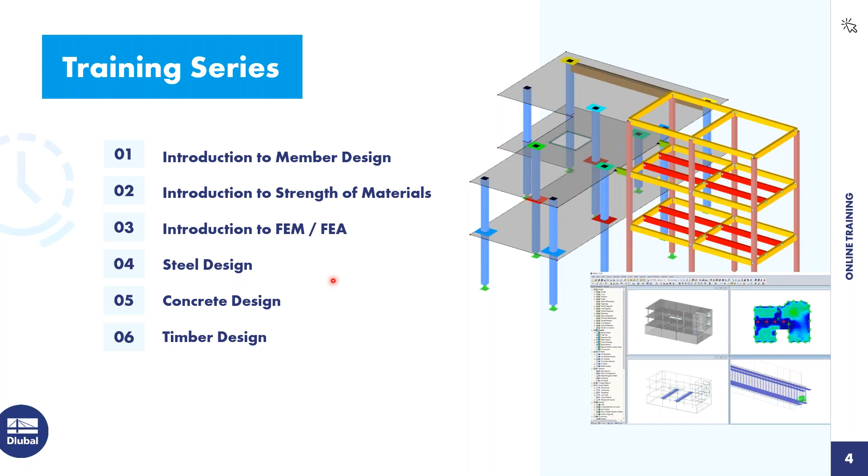Good, so our training series has 6 parts. Today is the 5th part, the concrete design. What can you expect from today? First of all, we start with an introductory example. We will model together a concrete beam with a cantilever. Then I will hand over to Juliane and she will show you how to design a concrete slab. So let's jump right into it.

No theory, only modeling in RFEM 6. So I will open this example and create a new model. For this case, I think it's familiar for you. I'll go here to File or click here on New Model. And now I create in this dialog a new model with the name concrete beam. I will leave it here as a 3D type of model and everything else is set.

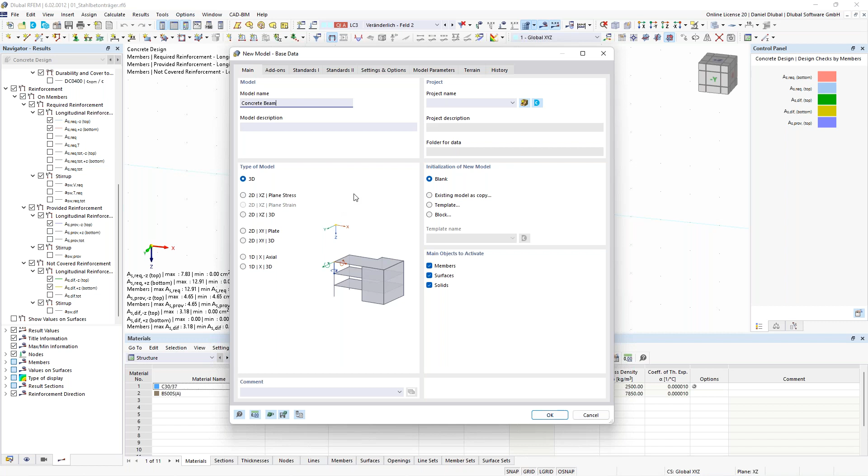Now for me it's important to activate the add-on concrete design. So here we go to the design add-ons, activate concrete design, because then we get additional design properties for our concrete beams or concrete slabs. So I have to activate this. When I have activated this, I go here to the 3rd tab, Standards.

Here in the Standards I see different chapters like for the design, standard group, load results, and also load case classification. And here I want to design it according to the European Eurocode, with this national annex of Europe. Okay, I will leave it like that and just click on OK.

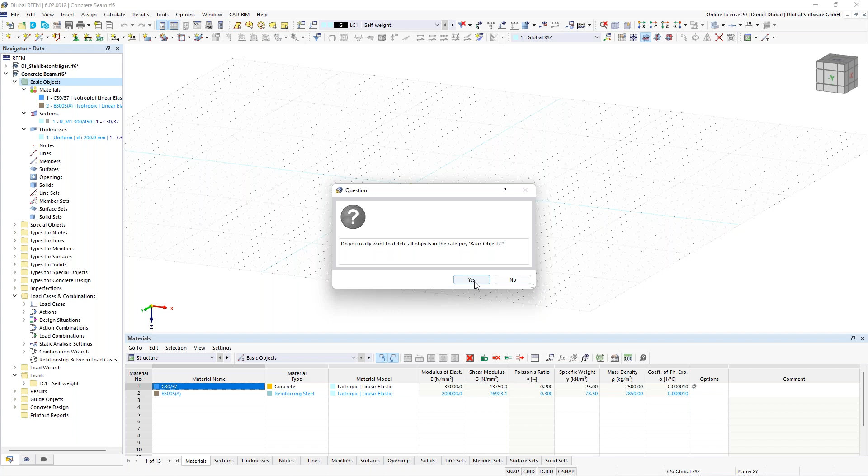And a new window opens. As you can see here on the left side, I have already some materials, sections, and thicknesses, and they are remembered from the last project I did. So I will delete them in order to create all these 3 things from new, just to show you how to do it. You can click here on basic objects with the right click and say okay, delete all basic objects. Now we can create it from scratch.

Okay, so before we do this, I would like to know from you if you already have some skills in concrete design with structural analysis programs, just to give me a kind of status about your knowledge regarding your concrete design skills. So I have prepared a poll, which I will start right now. Please answer these questions to give me feedback about your knowledge.

Okay, now most of you have voted. I close this, share the results, and yeah, so most of you have already designed concrete structures in a structural analysis program, I hope it was RFEM 6 or RFEM 5. For those who don't have this experience, that doesn't matter, you'll learn it today.

Okay, so again, back to RFEM. Here on the left side in the data navigator, I will create 2 materials, because for concrete structures we need 2 materials: one for concrete and one for the reinforcing steel. So I go here to new material. Now one of the biggest advantages here in RFEM 6 is that I can search for a material via this text box here, and I just enter here.

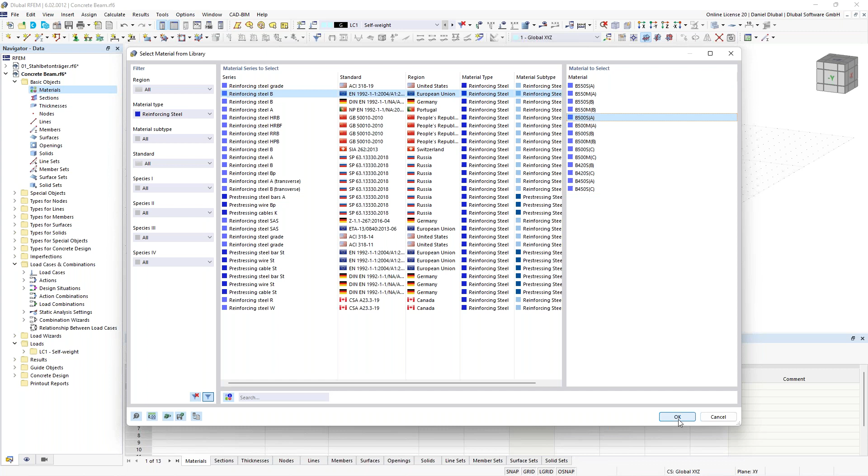So in this case, I choose here this B500S(A). I click OK. And yeah, this was it. I click OK again.

And the next one is to create a new section. So because we will model and design a concrete beam, I click here on section, click here on new section. And therefore I have to choose here this rectangle massive cross section, or when you don't have this, just go to the cross section library and choose this massive rectangle.

Then I can give here the geometry: I have a width of 300 millimeters and a height of 450 millimeters. Then I can see also the section values according to this geometry and also the stress points. And if I want, I can also show me the unit stresses. In concrete design, not so important, but yeah, we have implemented also this here. Okay, that's everything, I click on OK.

Thicknesses, I don't do right now. This will be more the part of Juliane, because she will show you what thicknesses are. Thicknesses are similar to the cross-section things for members. Yeah, this is the similar thing: thicknesses you need for surfaces, and sections for members.

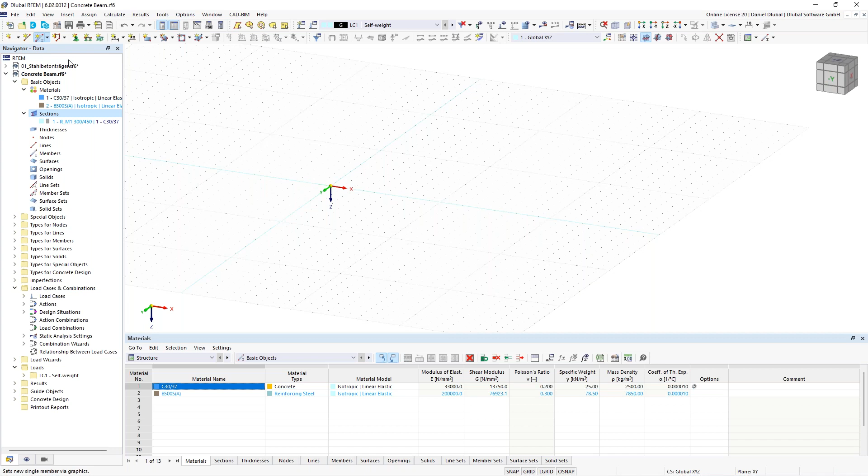Okay, so now we will model it together. We will model the beam. I go here to the symbol bar, click on new single member, and now I choose here the right section because I have only one section. This is everything, so I click OK and draw this member 8 meters long. I can do this via the grid points or also by inserting here the member length like 8 meters.

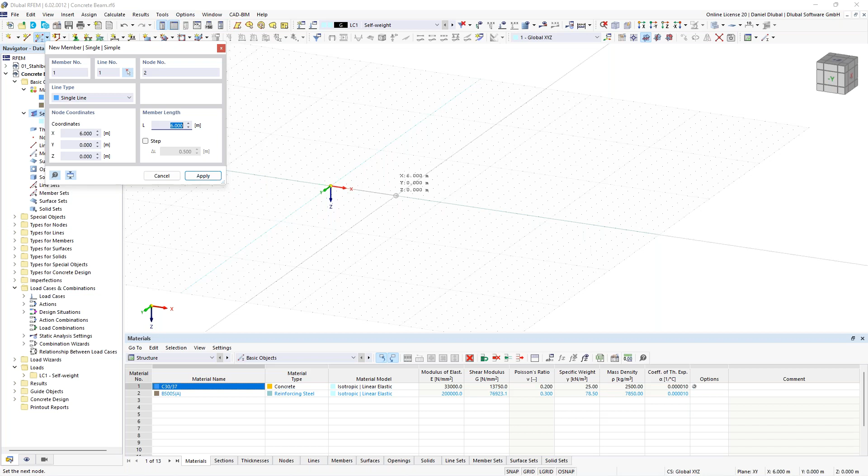And as you can already see, we have here already the provided reinforcement based on some general information about this concrete beam. We can modify it afterwards, of course.

What I want to do right now is that we divide this member internally. So the member remains as one member, but we will add an internal node. Double click on the member, activate the option nodes on member. And there I want to switch between an absolute distance. I say here, okay, from start please 6 meters away. And here you should create a new node.

I click on OK, and you see here this blue node. Double click on this node, he has the node type 'on member'. So this is a really nice opportunity, giving this node the option to be part of this member and not to divide it. Okay, so the next thing, supports, node support.

So I create here a new nodal support. Also, I want to activate the rotational around the global X axis in order to prevent torsion, and then a roller support along the X axis. This is this one. I click on OK. Perfect. Okay, yeah, so much to the modeling.

Now let's go to the load cases. I go here to the symbol bar, edit active load case. And here I have the self-weight. This is okay for me.

Now I want also to consider an imposed load case. In this case, we have two fields, one field and the second field. So I create the first one, this is imposed load field 1. Now I copy it and click here field 2. Now I choose here load case 1, because then I jump to load case 1 where I set some loadings.

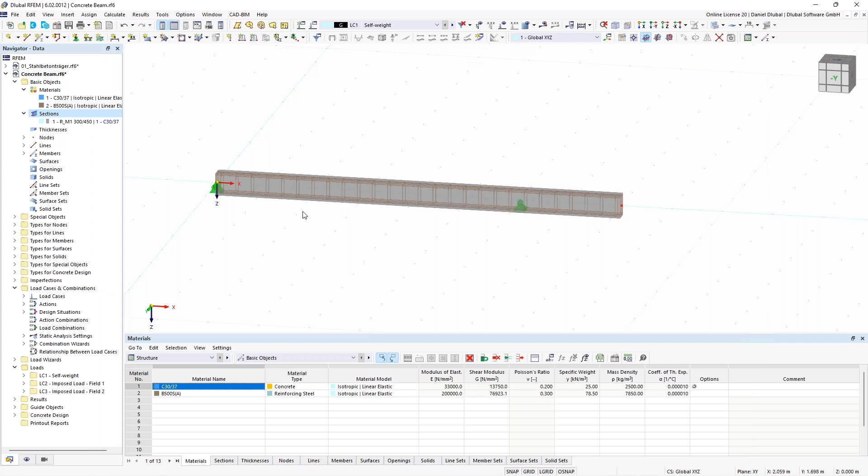Okay, so the whole concrete beam has a member load of 10 kilonewton per meter. So I click here on this member load, insert here a value of 10 kilonewton per meter.

And now the biggest advantage here in RFEM 6 is that I can stay in this dialog, just select the same member, and then afterwards just change the load case and add the parameters like the load magnitude again to the members. I don't have to leave this window. This is a real good advantage.

So I click this member, say apply and next. Now I change the load case, and now I have to change the load distribution because we only want to apply the load on the left field. So I say trapezoidal. Here in this case, I have 20 kilonewton per meter, 20 kilonewton per meter on the right side, and the load distance goes from 0 to 6 meters. I say in this member, please apply and next. Now I change the field and say from 6 to 8. I can insert here 1, say okay.

Now let's do a check. Okay, seems good. So back to the load cases, maybe a few words to that.

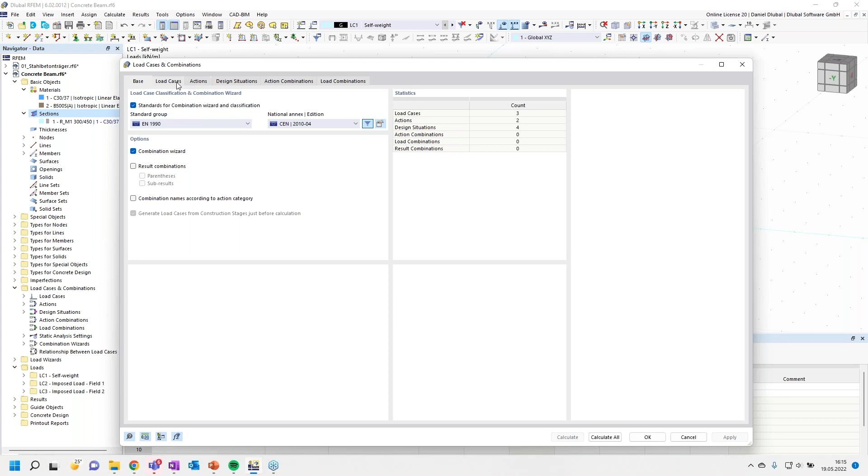So we have here this load case classification according to this European standard, so according to the Eurocode, and we also have this combination wizard. This combination wizard helps me combine different load cases with each other, considering the partial factors. Now we see here also these different actions, and depending on these actions, it will get me the right factors for combining it, and according to the design situations, it will combine it. So you can also take a closer look at the combination rules, like here.

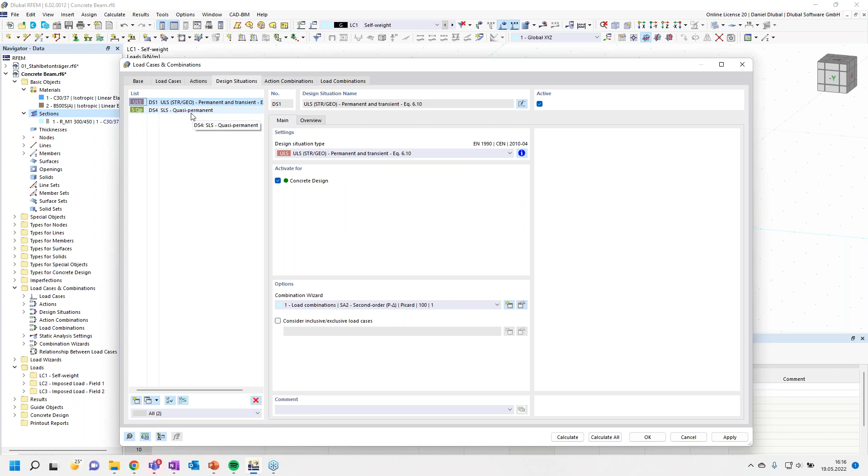Yeah, and for our simple example, we don't need so much design situations. So these two serviceability design situations, like characteristic and frequent, I will delete. I only need this ultimate limit state and this serviceability design situation, quasi-permanent. And let's go to the action combinations. And here, these are the factors I need for my load combination. Okay, good, this is everything.

Now click on OK. And now I need to define my design properties for my concrete design. So where can I do this? Double click on the member of this concrete member. And now you see here the design properties.

And when I have activated the add-on in the base data concrete design, then this option will be activated automatically. I can also deactivate this, and now you see, okay, all these registers here and the upper menu will disappear when I deactivate it. The other tabs are there. So...

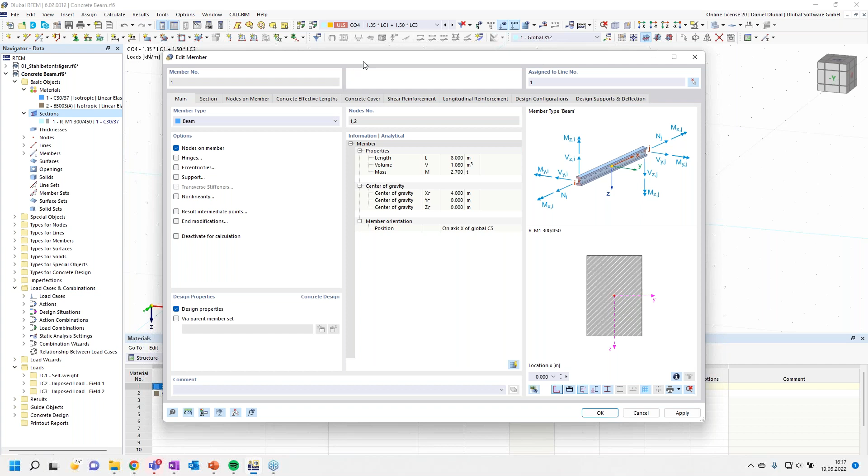What we do now is go through these tabs. What we don't need is the concrete effective length for any stability proofs, but this is a classical bending member, so I can neglect this.

So I go here to the concrete cover. Yeah, the concrete cover is pretty clear. So you have different exposure classes in order to determine the concrete durability. So you can open this. Now it's for all section sides. You can modify it. You see here this different exposure classes. Sorry, exposition classes was the wrong word.

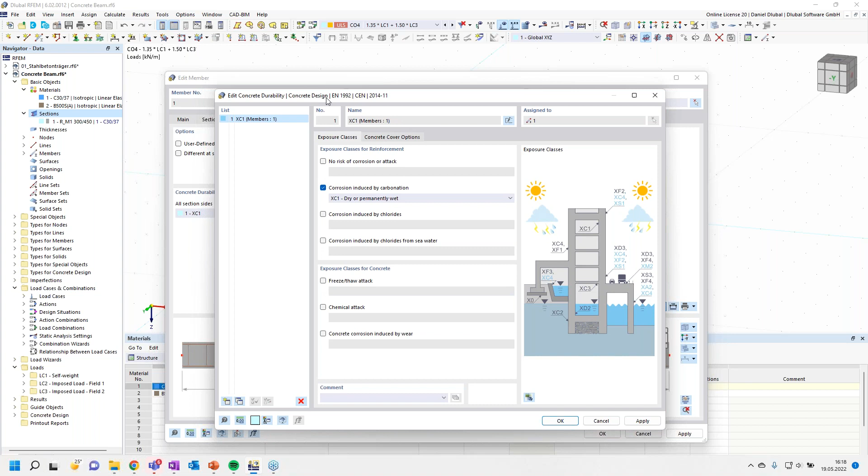Exposure classes. Here you have XC1 up to XC4 due to corrosion induced by carbonation, or also here when I want to consider exposure classes for concrete freeze-thaw attack, and so on. And through these exposure classes, the minimum concrete cover is determined.

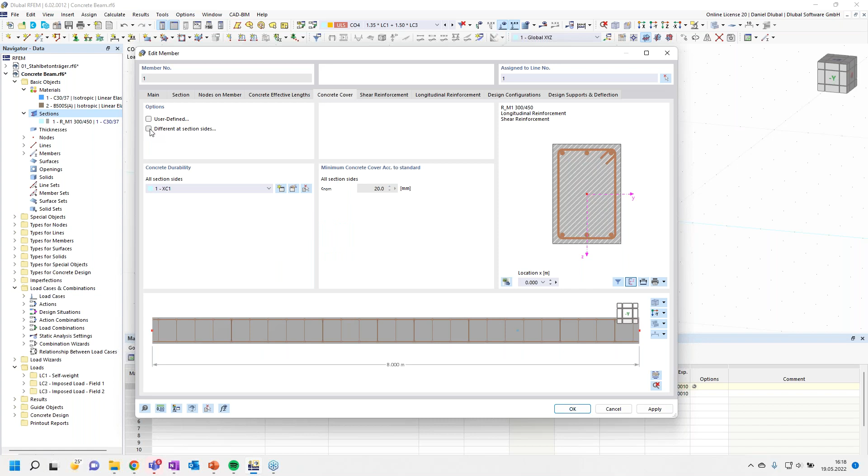So for our simple example, this simple XC1 is okay. I say okay again, and this minimum concrete cover is determined from the outer edge of the concrete rectangle to the outer edge of my stirrup reinforcement. And these are 20 millimeters, determined by the exposure classes. I can also say a user-defined concrete cover, or when I want to consider it for each side differently, I can activate this different at section sides option. Okay, so much to the concrete cover.

You see also here on the left side, you can add more shear reinforcement spans, then you can separate the distances into several fields within this member.

Okay, now let's go to longitudinal reinforcement. Here I have also some possibilities regarding the reinforcement type, symmetrical, unsymmetrical, and in this case I choose unsymmetrical. Okay, unsymmetrical means that the top side and the bottom side are different. So for the top side I choose here 2 and change the diameter from 20 to 12. And also I want to activate a lateral sidebar with 10 millimeters. And for my bottom side, I choose here 16 millimeters. Okay, so much to that.

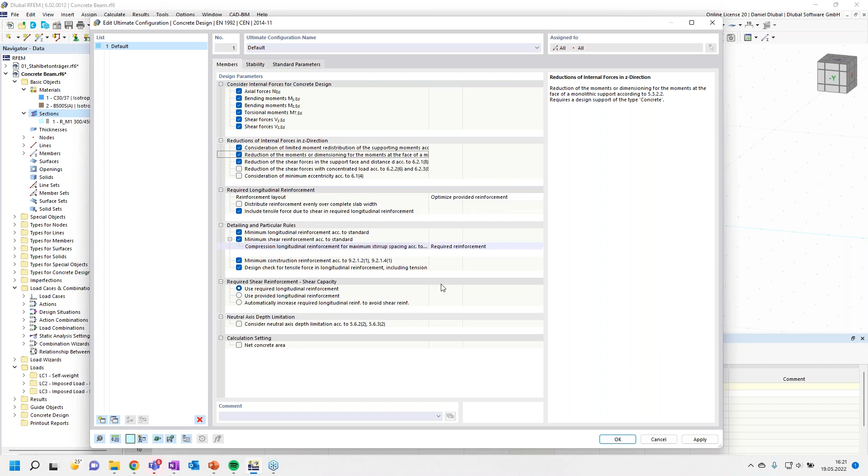So yeah, here you can define also several other options for the design of concrete. These are the information given by the standards. Okay, and the same also for the serviceability, but yeah, this is some more information.

So now the last tab is the design supports and deflection. When you want to design the deflections, so really the deformation proof, then you have to define here different design supports. We do this here for this simple beam. So in this case, I create a new one with a support width of 360 millimeters, and it's no inner support, only support in Z-axis.

And yeah, that's everything. Now I create a new one also with 360 millimeters. It has a monolithic connection, and the ratio of moment is in this case 0.9, and I don't need to consider any y-axis. I click on OK.

Now I have to assign it to the right nodes. So that is on member start, this is correct. And now here to the middle, the second one. Oh, sorry. No, this is not correct. Now this is correct. I say OK.

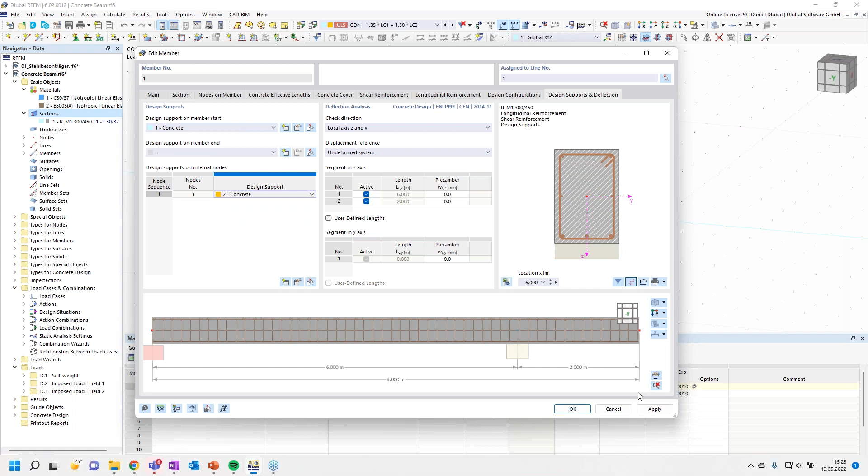And now I can calculate it. Let's say concrete design. And now you see, okay, how the whole situations are calculated, also for the serviceability.

And what I don't need is to design for the serviceability limit state. I only am interested in the results of my ultimate limit state. So I calculate the concrete design again. And now I see here the different design ratios for members, and I see, okay, here detailing of members, and also the ultimate limit state section resistance is not fulfilled.

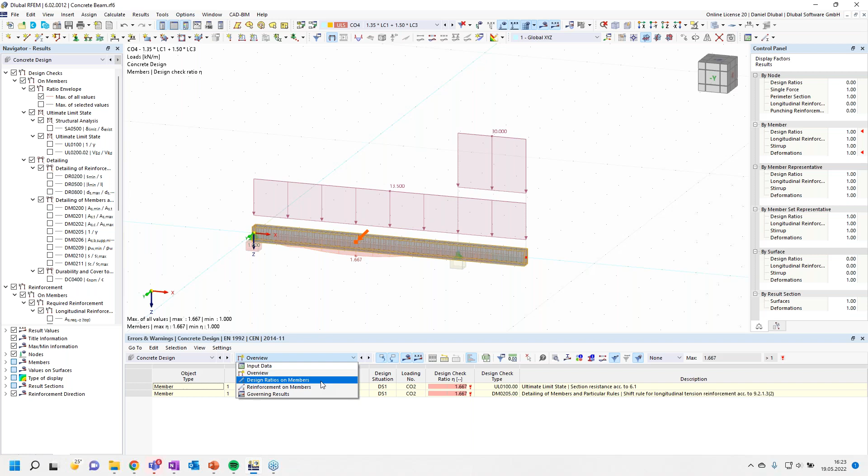So what can I do? I need to strengthen my reinforcement. Maybe here some words on this reinforcement. Here on the left side, I see the results navigator, and here I have the possibility to show me different results, like the reinforcement.

So I see here the required reinforcement for the, maybe I deactivate the design check. I can show me the required reinforcement for the top and the bottom. For the top and the bottom reinforcement, I can also show me the stirrups and also the provided reinforcement for the bottom side.

And I can deactivate here the rendering of the reinforcement by going here to the display navigator, go here to types of concrete design and deactivate it. And now I can see here the result a little bit better. So I see, okay, my provided reinforcement is lower than the required reinforcement.

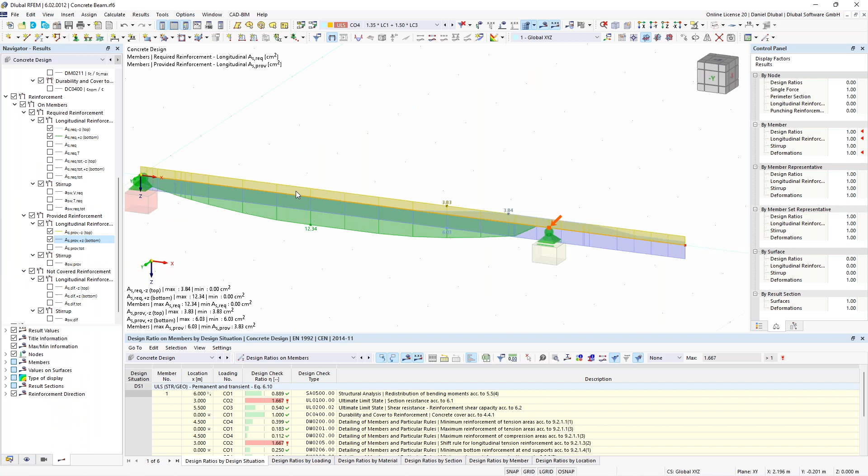So I need to add some more rebars. And also, in order to calculate the difference, what I need, so the not covered reinforcement, I can also show it. Okay, so what can I do?

Go back to the concrete beam, go here to the shear reinforcement. Now we want to add more rebars for some places. So I go here and copy it. And now I want to cover it for different fields. So you see, okay, the start and end goes from 0 to 4. I say, okay, this should go to 6.

And this one should go from, oh sorry, this should go from 5 to 7 with a distance of 0.1 meter. And the other one should go from 7 to 8 meters.

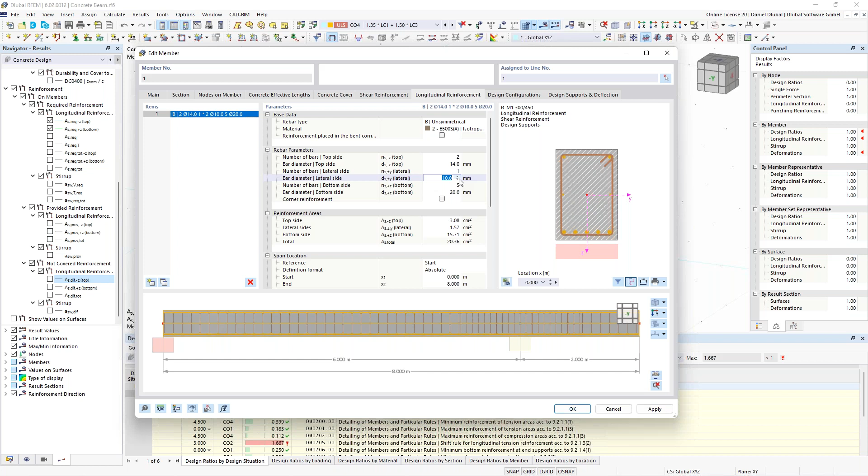And the longitudinal reinforcement, let's make it quite easy. So what can I do here is just increase the diameter here for my top side and add here a diameter for the bottom side to 20 with 2 bars more. And it looks like that. I can show me also this reinforcement plan by clicking at this icon, and I see it here like that.

Then I click OK. I design it again. And now I see here my fulfilled example, my fulfilled design check ratios. And by clicking on one of this, like this one, you see also here this design check.

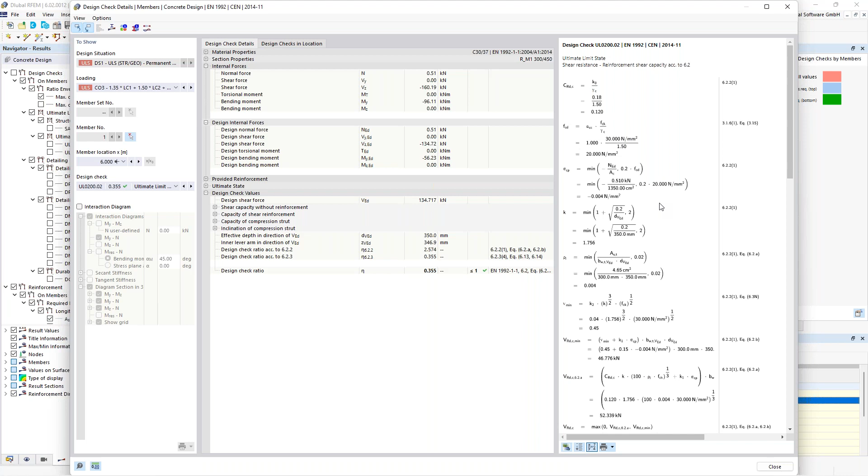Also, you can switch here to different design checks. So in this case, we have here the design check according to this standard: shear resistance, reinforcement shear capacity. And when you are studying and you want to compare your results with the results of our program, then you have here an overview of how the program did this. Okay, so much to the beam design.

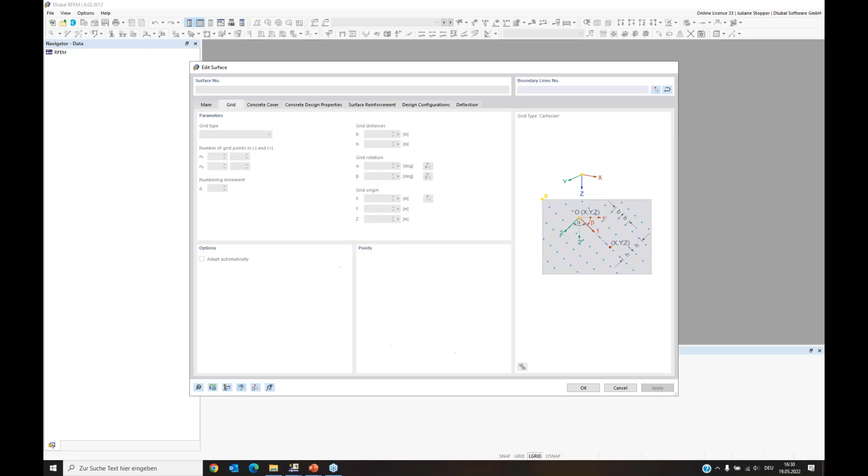After that, we will do the analysis and use the results for the concrete design. So this is it so far as a preparation. Now we can go into the program and start modeling.

I will again open a new model with this icon here, and we get into the base data dialog. I enter the name, it will be a slab, and it's made of reinforced concrete. So as additional information, I give it here.

And yeah, the other settings we don't need to change. Again, we have to activate our design add-on, the concrete design, and in the standards I also want to keep the National Annex CEN as Daniel did. Okay, so we can agree and say okay, this is okay.

So now an empty model is prepared for us and we can start modeling. And I would like to use a guide object with you. I would like to use a background layer.

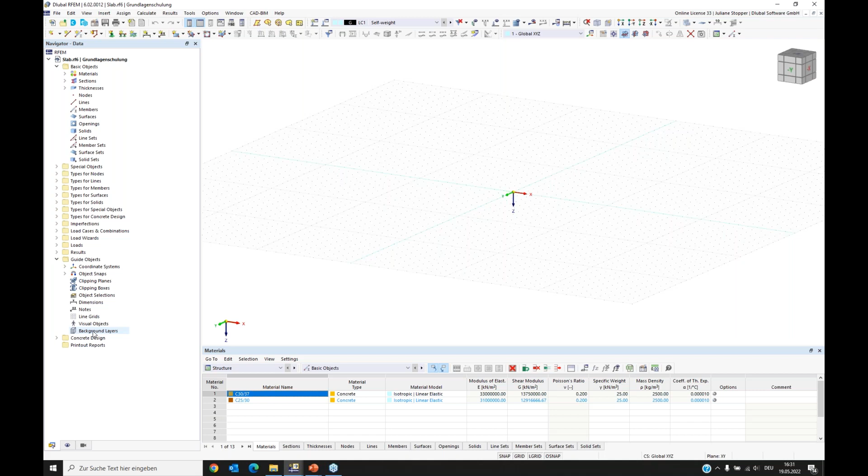We have a drawing from the architect in DXF format, and we can use it as an orientation to create our RFEM6 model. Therefore, I have to get the file from my folder where I put it, and I have here the ground plan for our slab. And we have here the preview.

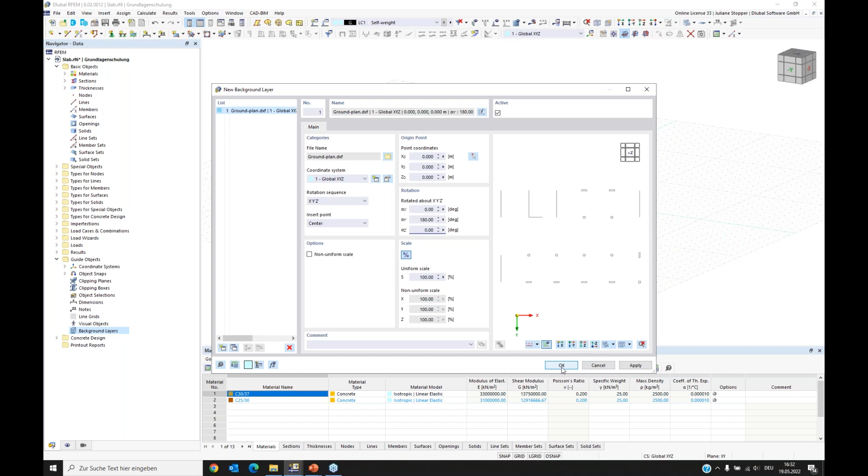We can check it, and looking at this, I can see that I need to rotate it with an angle of 180 degrees around the y-axis. Now in my preview I see this is what I wanted—I want the ground plan to be positioned like this as a background layer. So I can say okay, and I have it in my model now.

So all these lines are DXF objects. Now I need to create my objects that I can use for the RFEM6 model and the analysis. Therefore, at first I want to start with the lines.

I will create the boundary lines for the slab. We have one here and we have one here. If you want to end any process you are in, you can do it with right click, and you can leave the thing you are doing currently.

So now I want to copy this line. I select it, therefore, and I press Control, and I can click on the line and then draw it to here. Okay, and I will do the same with this line. I press Control and I can put it here, and I finished my boundary lines.

Then also I want to have lines here, because the lines we see are DXF objects, and I need to have parts of the structure modeled with RFEM6 objects.

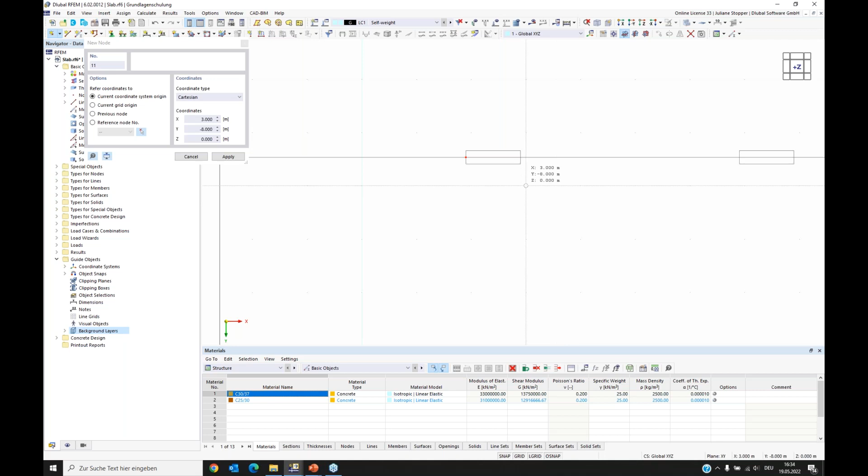Okay, so what I also need is nodes. I need nodes for these places where the supports or the columns are placed. So I put some nodes—I will do it here. I can see that I need an X value of 2.40, but I cannot reach here correctly. So I put this node here and I put another one here.

Now I can edit this node. I double clicked on it and I can see the coordinates here. As we saw, I need 2.40. I can say okay, and it goes there. And here I checked it, I need 7.40, and then it will be at the right place.

Now I prepared the nodes on that line, and I need them actually in this line, and this axis as well. So I have to select them. I want to copy them. With pressing Control, I can again and again add to the selection. Now I want to use drag and drop.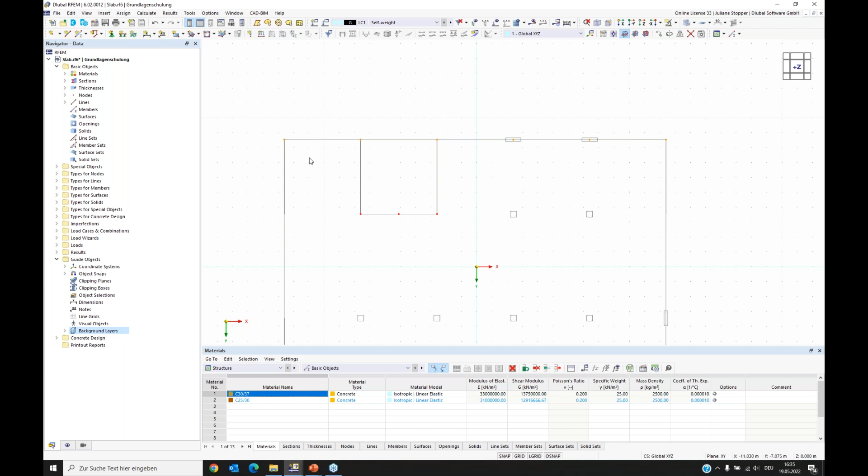I again press Control and I can take the node, copies are created, and I can put them at the place where I want them. Here's the end of the wall and it fits. Now I can see the newly created nodes are selected again, so I can go on with them.

Now I want to show you this menu. I did a right click on the node. I also can use this move and copy option. I say I want to create a copy and I have to give the displacement vector here. Now I want a vector like this. I can say apply and I can see the program copied it, and I can repeat this and do another copy into this row and say OK. Now I have all the nodes that I need for modeling.

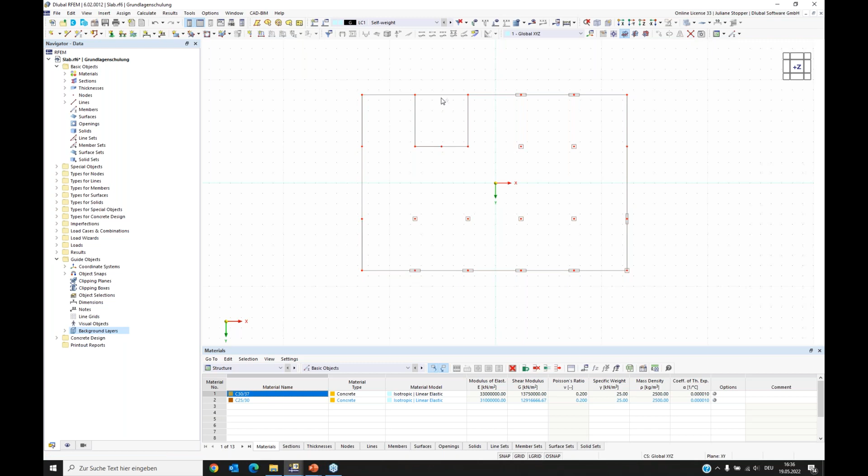Now there is one thing I want to do. I want to divide this line into parts because when I want to define the surface, I want the surface to be within these lines. So I shouldn't have a line that is not divided. In order to do this, I select all my lines and I can use this option here. Now every line is divided at the nodes or lines that it's connected with.

Now I prepared the first step of the geometry. Now I also want to use the data navigator and work from top to bottom like this. First we want to check the materials, have a look at the list.

I also have the first two materials from my last model, and I want to use them with you. It's the C30/37 and also the C25/30 that we need. One material is missing, our reinforcement steel. So we go to the library and choose, for European Union, the steel, and I want to have this.

What I remembered now is here I will check this. We will have a look here. No, it's okay. I checked the standard because it's important that the standard fits to the standard you selected at the beginning. But it fits, I have the right standard. Okay, so now my material list is fine.

I can say OK and leave this dialog. Then we can go to sections. I also want to delete it so that we can create it together. We create a new section.

And it's right, it's going to be the section of our L-beam, and it has the same material like the slab. Here we have provided cross-section types for beams, and we are right, we want to use the rectangular.

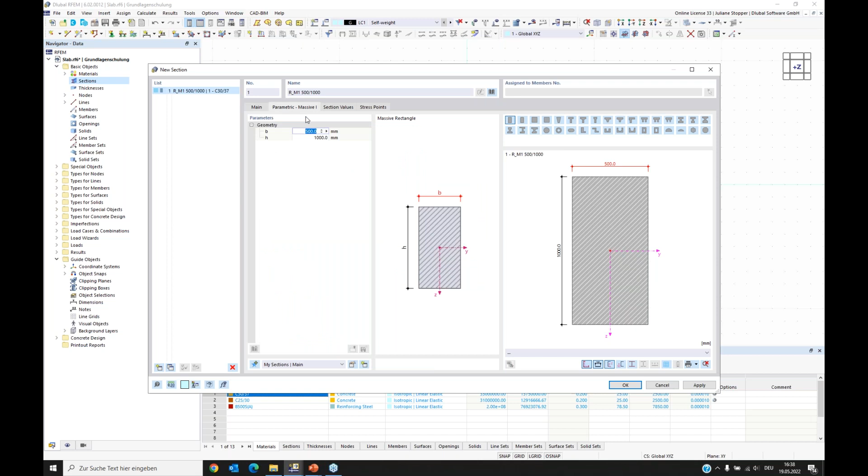We can go to this dialog for entering the dimensions. Now I will show you. We want to create our L-beam, so we have 24 centimeters and 45 centimeters in the height. We can enter this: 24 centimeters, and 45 centimeters, so 450 millimeters.

Then I have my section prepared for the L-beam, and I also will prepare the thickness that I need for the surface. As Daniel said, for beams, for 1D members, you need 2D cross sections, and for our surface, which is a 2D member, we need only to define the third dimension, the thickness for it.

So we can go here. We have the dialog for the thickness. It shall be a uniform thickness. This is right, it's the material for the slab. It's also right, but it has to be 24 centimeters, so 240 millimeters. Okay, and I say okay.

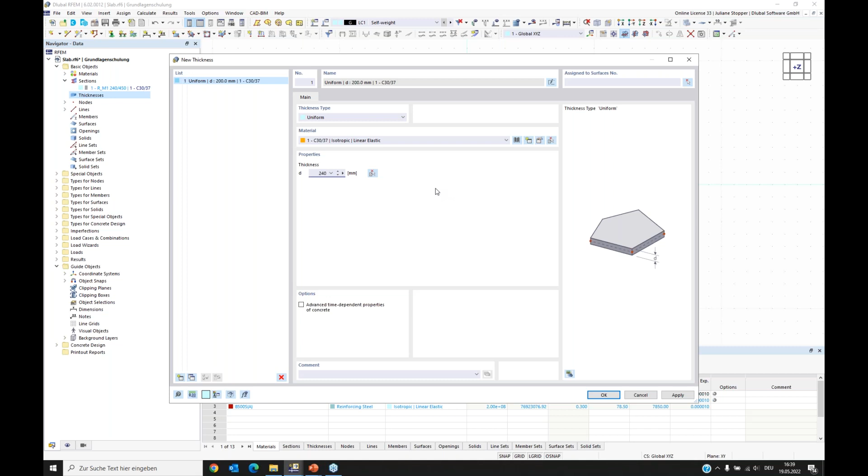Now I prepared my cross sections. Then I can go on with creating the surface. I could do this from here, but I want to use an option we can reach more easily. We can define a surface via the selection of boundary lines, and this is what I want to use now.

Here we see the dialog for the surface. Here we can enter all the options the surface has, all the settings and input the surface needs. And it shall be a stiffness type standard. This is good, we have the right thickness and the right material. As we can see, because we applied the concrete design add-on, we also have design properties. Those I want to have a look at with you later.

Okay, so we can agree. And now the program, if we go into our working window, the program tells us what to do. You can read it here.

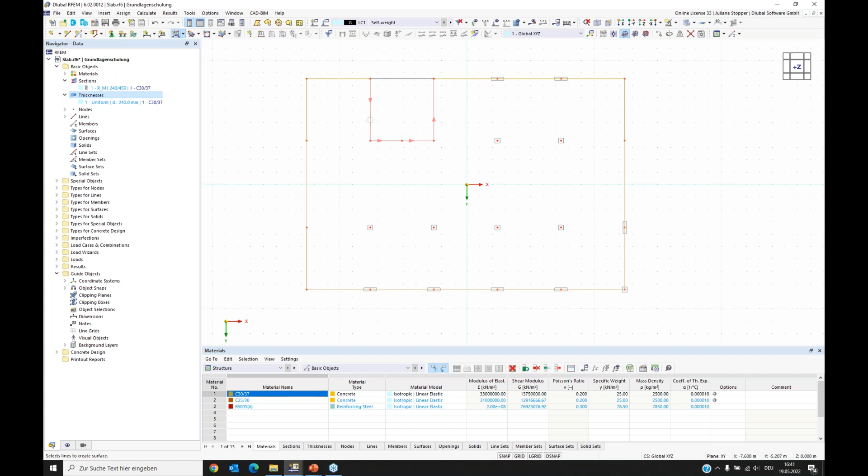When I go back with my mouse into the field, we can see that now we are supposed to select the lines for creating the surface. So I just select the lines, and RFEM 6 created the slab, the surface.

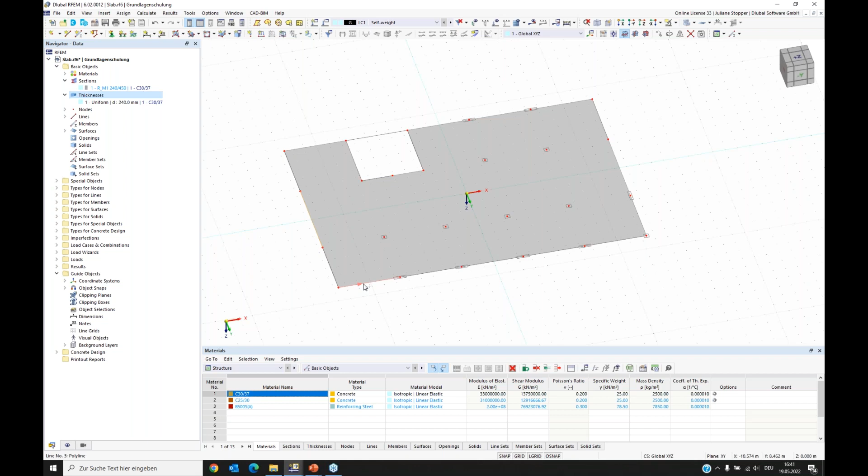Okay, I can leave this. I do a right click, and now I'm free again. So now I want to create the L-beams. The L-beams are positioned everywhere where no wall is positioned at the border lines.

So I select all the lines that will get or receive an L-beam between the columns. Here's going to be a wall, so I go on here. We have a wall here. Here shall be an L-beam, and here are going to be walls. So my lines are selected. I can do a right click on the line and say edit lines.

And I come into the dialog for editing lines. And here I have the option to say that for these lines, there shall be a member along these lines. And then we activate it. And when we activate it, we get into the dialog for defining the member.

And here we can see the member type we have to set in the main window. And we have a special member type for L-beams or T-beams. It's called RIB in RFEM 6, and I select it. Here you can see we want this type of member. And with entering RIB, we see that a new register opened, and we have to look at it.

Here you can decide whether your beam shall be below or above or maybe centric in the surface. We choose the one it shall be positioned below. Okay, then we can go on.

We go into section. We have to define the section for the member, for the part below of the surface. And RFEM 6 automatically applied the first cross section that we defined. So this is the right one. This is the one we defined, and the material is right as well.

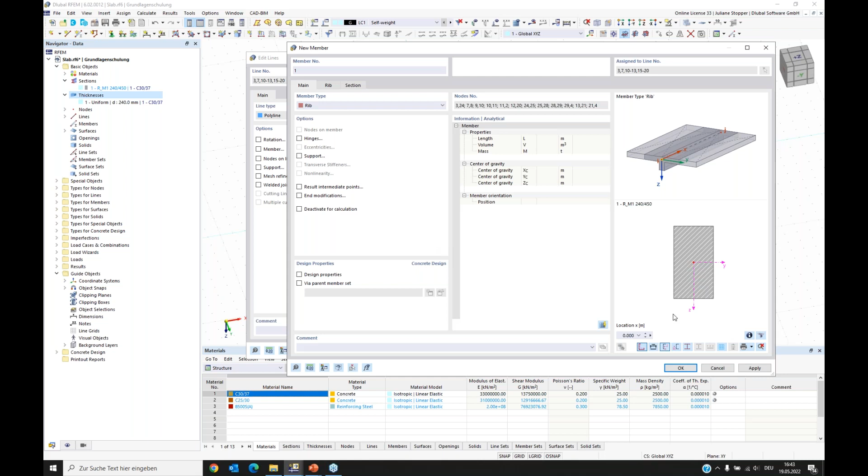And I say okay, and leave this dialog. And now all these lines have these members that we defined applied, and we can see it in the main window. Yeah, now we finished actually the structure.

As I said, we want to have the design for the slab. So we are actually not interested in the inner forces or stresses or strains in the walls or in the columns. That's why we don't need to model them.

We have special type of supports that I want to show you. At first, we therefore go into the types for nodes. Here we can find nodal supports. And I want to create a new one.

We have in RFEM 6 the option to give a support that contains the stiffness via fictitious column. This means I can activate it, and then a new register is opened and we have a look at it. Here we can enter the dimensions and the material of the column, and RFEM 6 from this information calculates the stiffness the column has. So we can model a support that behaves from a point of stiffness like a column behaves, but we don't need to model the column, and we don't get inner forces or something. We are not interested in it.

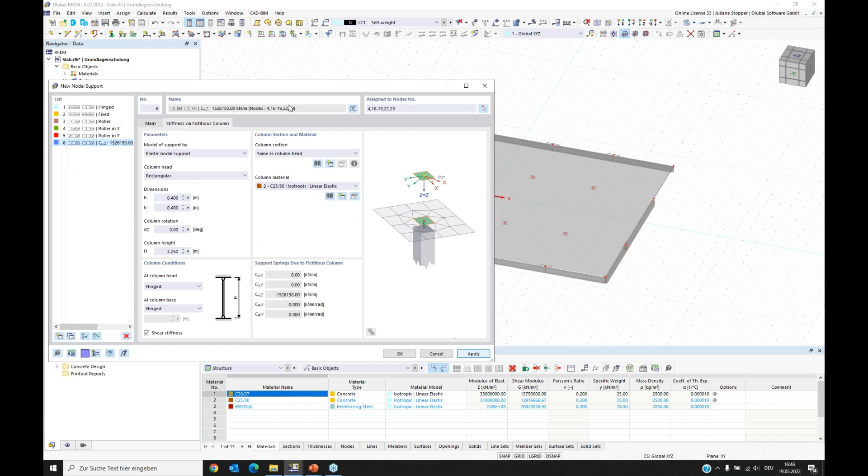Here, okay. And now again, I can stay in the dialog, I can say apply, and I can stay in this dialog as I have some more columns, these, and I can go on with defining them.

I also want to delete those nodal supports as I don't need them. And now I can create a copy of the last support that we did together, because it has, it's again a stiffness via fictitious column. And what is changing is the dimensions. It's going to be 1 meter in the width direction and 0.25. Let's check it. Yes, 0.25.

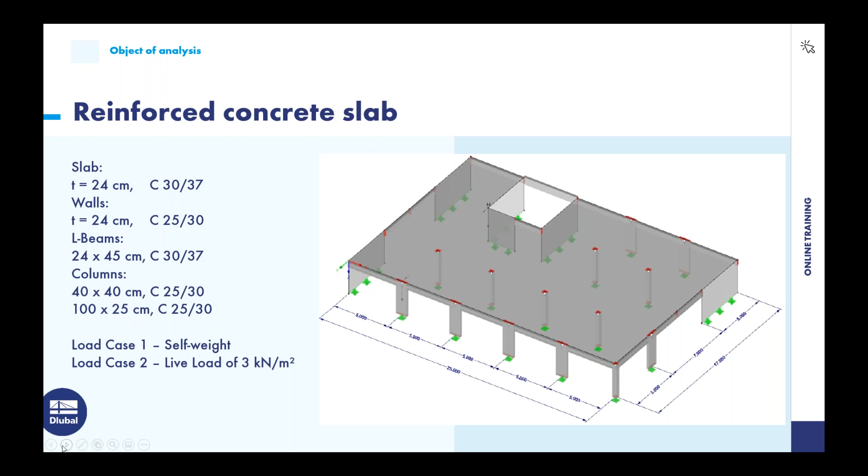It fits 25 centimeters in the height. The height of the column is 3.25 meters. This is right, and the other settings we can keep, it's right from the copy. I can apply these columns here, say apply again, and I can create a last copy. Here I change only the width and height, and I can apply or assign this to this node.

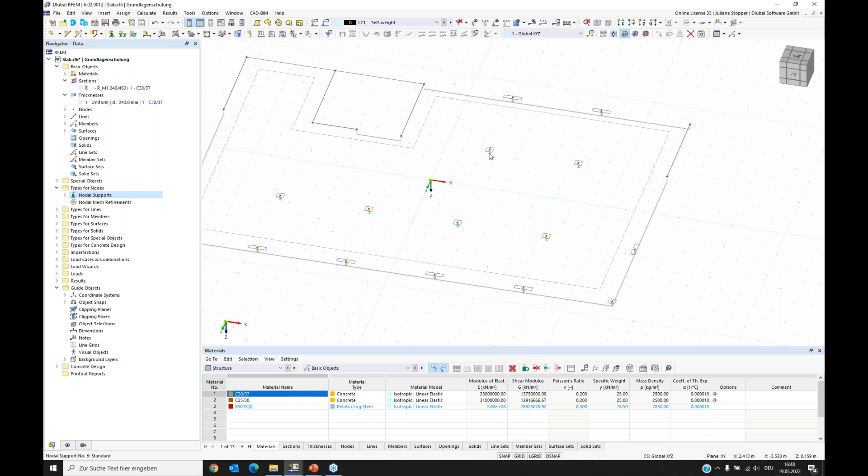Now I have all my different types of columns defined, or the supports of them, and we can see it here. I can also change the display of the model, say I want to see a wireframe model. Then we can see the supports more clearly. If you think the supports are a bit small, you can right click on them and make them bigger, so it's easier to check whether everywhere a support is supposed to be, one is.

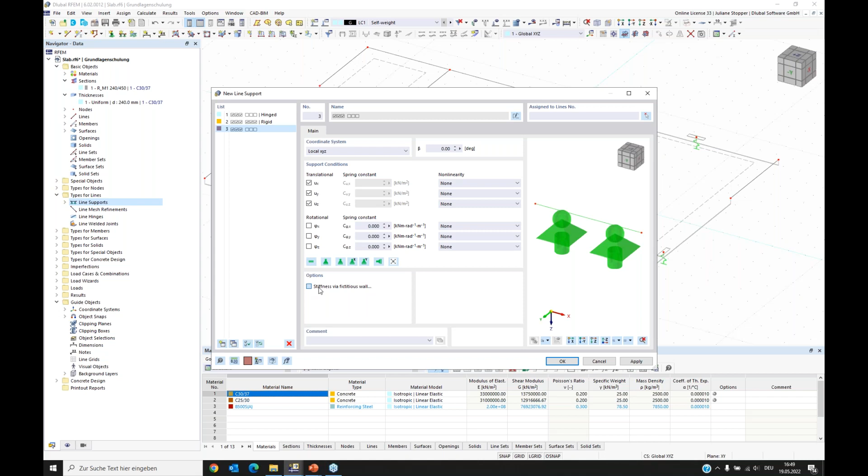We have the same tool for walls. We can consider the walls as line supports, so we can go into the folder types for lines, and here we have the line supports and can create a new line support. Here I have the stiffness via fictitious wall, and I can only reach this option if I activate the local XYZ coordinate system. Now we can activate it, and we again have to define geometry and material.

The wall has a thickness of 24 centimeters and again a height of 3.25 meters. The material shall also be material number 2. Now the program calculated the stiffness that resembles the wall. The X direction is the direction along the length of the line, so we have a stiffness in this direction, and the Z direction is the vertical direction. We also have this spring.

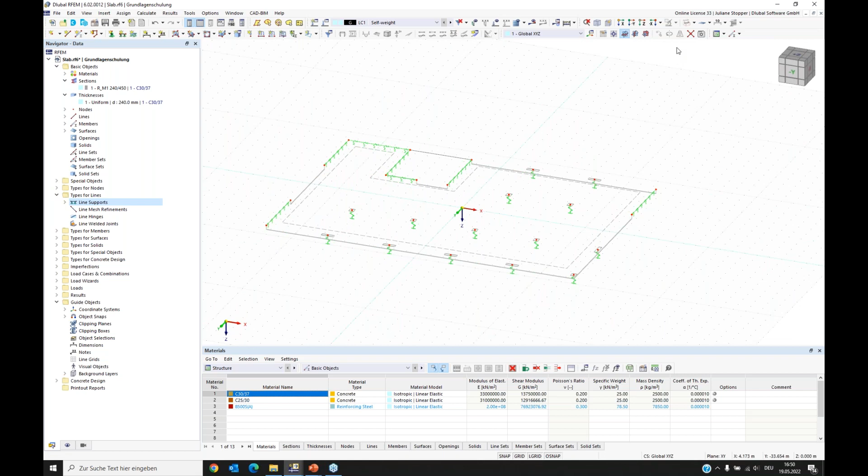Now we can assign it to the lines where we actually have walls, and they are these, and here's another one, and I think it's completed. I can say okay, and we are now fine. Now we have all the supports from the walls and lines. I go again to the transparent model, and I can see our structure. We have finished the structure now.

What we need now is the loads. So we close the settings for the structure and go to the load part. First we enter the load cases and combinations dialog, and again we activated the combination wizard as you saw with Daniel. Now we can go to load cases. We have as a default load case, load case 1, which is always a self-weight load case.

You can see here the self-weight is active and it's a permanent load case. We want to create another load case, the live load case. Here we don't want the self-weight to be active, and it has to be an imposed load case. It's important that you take care defining the right action category, because we will do action combinations. The combination wizard is going to generate them for us, but only correctly if you set the right action category. So we have a permanent load case and an imposed load case.

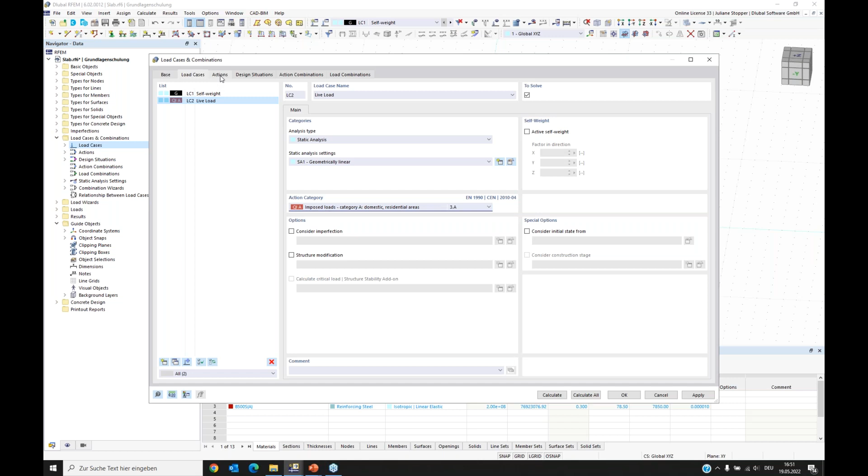Then we can have a look at this. Here you can see which type of action categories you have in your model. This helps when you have a lot of load cases in bigger models, to keep an overview. Then we can go to design situations. We have those prepared for the concrete design, and I want to show you also the combination wizard. Here you can do settings for how the combination wizard shall combine or create the load combinations.

I want to use the geometrically linear analysis. I activated it here, and we don't need to consider imperfection cases, so I can set it to okay. Then we can go on. We can check the action combinations and see also the load combinations that are generated from that. Now we finished that part. It's okay, we have the load cases and the combinations.

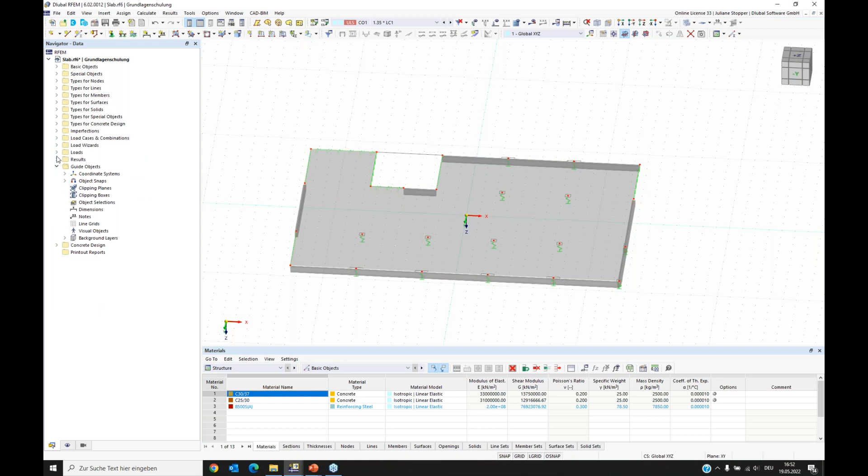Now they are prepared and we need to fill them with loads. We have this folder, loads, here, and we can see our load cases, but they need to be filled. We need to say what kind of load has to be contained in the live load. In self-weight, we have a load because we said self-weight shall be active. This means the program calculates the self-weight of the structure from the cross sections and the specific weight of the material.

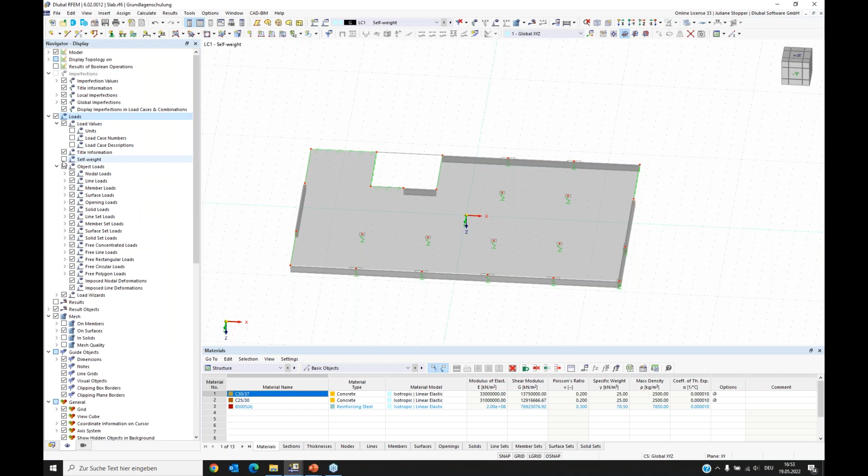So we can have a look at this. I switched from data navigator to navigator display, and here we have the option to activate loads, and within the loads we can activate the self-weight. Then you can see for load case self-weight what the program calculated for the construction parts, so load case 1 has a load. Now we go to load case 2, and we see we don't have a load yet, so we create one. We create a surface load with right click, say new surface load, it's supposed to be 3 kilonewton per square meter, and we apply it to surface number 1. It's okay, and now we can see we have a load in our live load case.

So I want to save it once. It's good to save from time to time. Now we prepared our model. We have the structure, we have the loads, we have the geometric boundary conditions. Now our model would be ready to do the finite element analysis. We could calculate the stresses and strains, the inner forces and displacements for this structure.

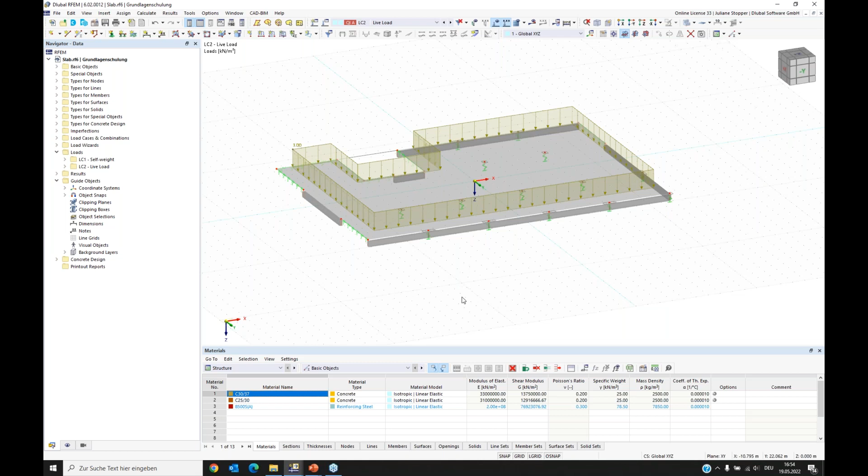What we want to do as well is the concrete design, so we have to define the properties for the concrete design. Therefore, I just double click on the surface and we can see all the design properties that I can set for this surface. Now I want to have a look at them with you.

Here we have the concrete cover. I think Daniel said a lot about it, so it's fine, we can go on. We have for the surface the option to set in which direction the first reinforcement direction has to be. For us, it's now X, and the second one is in Y direction. Then it's okay for us.

We can go on. Now we have the register for surface reinforcement, and we see that our list is empty. So we have to define a surface reinforcement, and we can do this via clicking here. And then we have the dialog for defining new surface reinforcements.

Here we have a surface reinforcement of the type on surface. This means the surface that is assigned will get this reinforcement everywhere, so independent of the geometry of the surface, all the surface will be covered with this reinforcement you define in here. I want to, at first for the top, define a reinforcement of 8 millimeters with a distance of 15 centimeters, and in the transverse direction also 8 millimeters with the same distance. The program tells you how much centimeter square per meter you put, and it's fine for me.

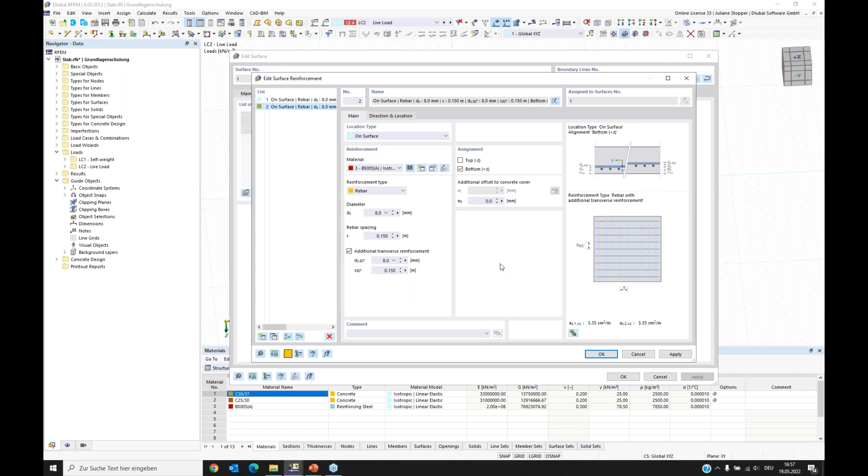I say apply, and I copy this reinforcement because I just put it at the top. I want to create the same at the bottom for now. I entered two different surface reinforcements for top and bottom, because I can imagine that maybe later I will change one of them. They don't need to be the same. So I can say okay, and now my surface has a reinforcement.

Then we again here have design configurations. We can have a short look into them. With Daniel, you saw those. We can have a look at the surfaces. This is something you should have a look at. For now, for us, we keep the default settings, but you should know what is decided in here.

For example, now we have minimum longitudinal and maximum longitudinal reinforcement defined for plates or for slabs, which is fine for us. But if you want to make the design for a wall, you should apply design configurations for walls and this setting for walls. Yes, but for us, for now, it's okay. I can say okay and keep the default setting.

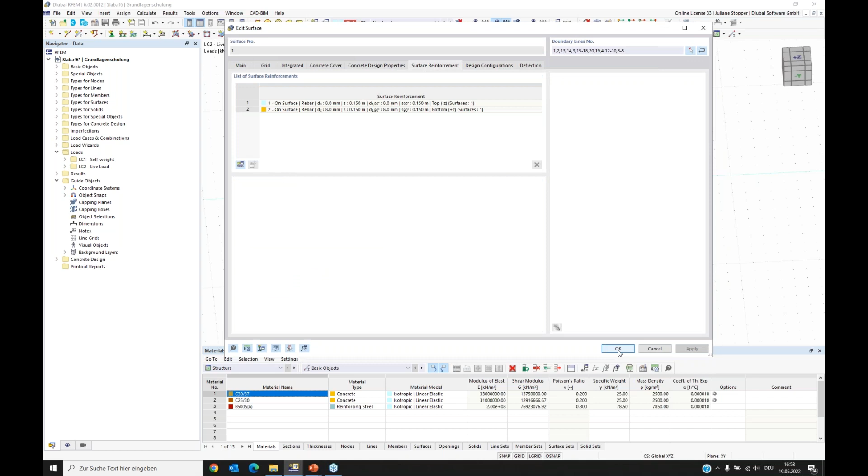We have something similar for the serviceability state. Yeah, this is what I wanted to have a look at with you for now. We defined our surface reinforcement, and then I close it. And now we also can see it in our graphics.

Here I can switch off the loads, so now I can see that my reinforcement is contained in my surface. So this is it for us. We can now start the analysis, and I want to do it from here.

We can here choose the concrete design in the table, and here we have our input data. For now with you, I want to just do the ultimate limit state analysis, so I switch off those. And also in the objects to design, I want to say that I only want to solve the surface. Actually, the program sees that the ribs, which are members, cannot be calculated. They are invalid because they don't have a reinforcement, so they wouldn't be contained in any way.

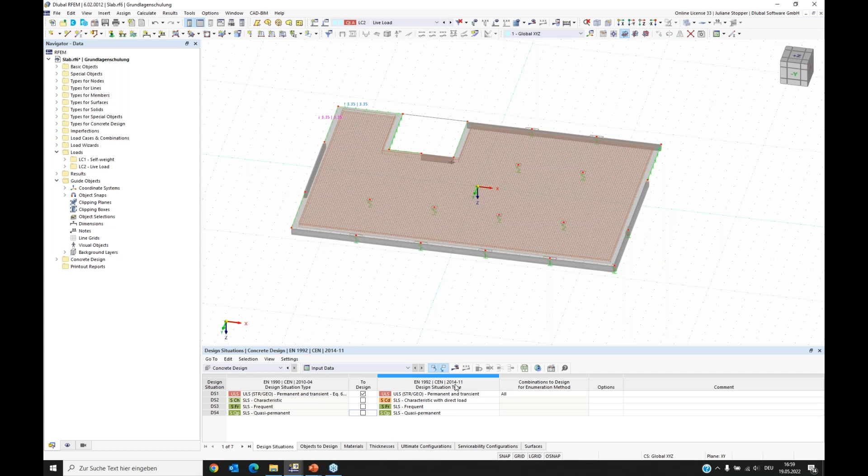And also I switch off the nodes for punching, so we have our surface. Yeah, and we did these settings. Now we can start the concrete design from here. And I started.

The program knows when we want to do the concrete design, it also calculates the design situation that is needed for the concrete design. And it also calculates the load combinations that are contained in that design situation. So it calculates everything that is needed for the design. Yes, and here we have our result.

I want to show you, as I said, for the concrete design, we said that we want to solve the ultimate limit state, which uses design situation 1, and design situation 1 contains all the ultimate limit state load combinations.

So if we check one of them, we see we also have results for those. And what I want to show you also is here we have our navigator results. Here we can decide about the view on results, and we can set here also static analysis. Here we have our results of the finite element analysis. I will switch off the mesh, we don't need it. Here we have global deformations, internal forces, stresses, and strains. And these results are used in the concrete design.

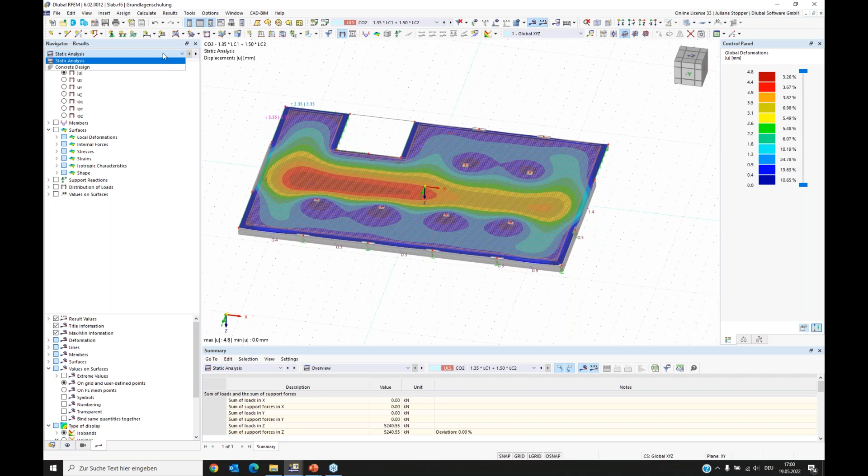So now we can go to the concrete design. I want to now switch off that I can see the reinforcement. It disturbs the view on the results. I can do all these settings for the display and the navigator for display. And I can here in the model, in folder types for concrete design or in the point types for concrete design, I can switch them off so I don't see any reinforcement, and I can look on it from in that direction.

So now we have our first design results, and at first I want to show you this. This is the overview for the design, and it generally at the beginning doesn't look very friendly, as here all the problem points are listed. You see a lot of red at the beginning, but this will change.

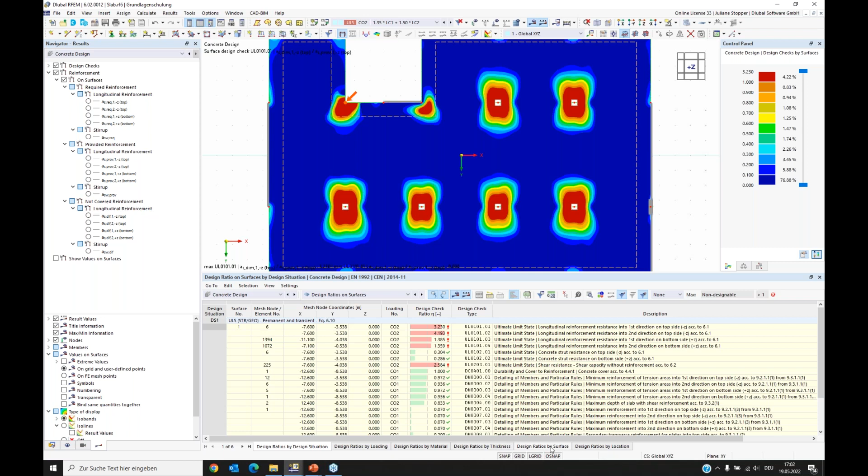I can here say that I don't want to have this overview. I want to see now, for example, design ratios on surfaces. And if you have more surface, you can also set that you want to have it separately for each surface. But we have only one now, so this list is fine for us.

Here we can set which design checks we want to see, which design check types. And now we have the ultimate limit state active, and here are also detailing proofs active, and I don't want to have a look at them now. We only want to at first check the ultimate limit state, which is also the much more important thing.

Okay, so now we can have a look at the navigator results a little bit more in detail. We have two main things that we can look at. We can look at the design checks or at the reinforcement. At first, I want to have a look with you at the design checks for surfaces. And we now are looking at this one, UL0101, which is for longitudinal reinforcement into first direction on the top side of the surface.

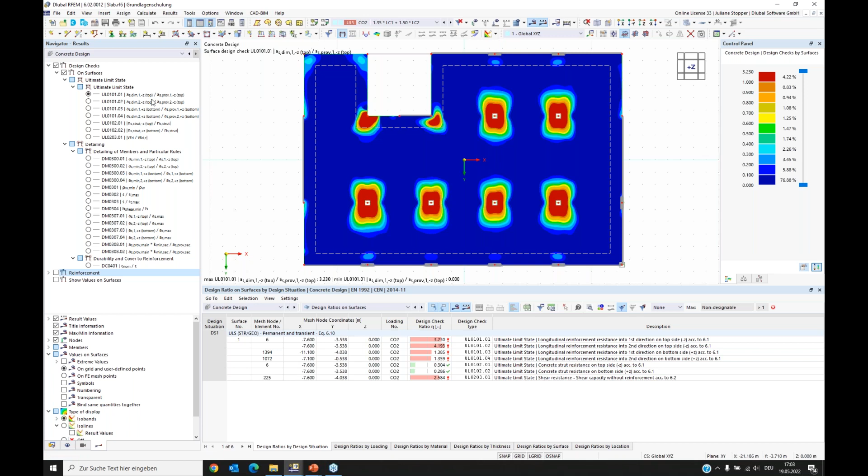And this is something we can imagine and expect. We have the most high ratios around the supports. So we have here at the top of the surface the tension around the supports or above the supports. And the same is in the second reinforcement direction, we can see.

And now we can guess what will happen if we look at the bottom side of the surface. Here we can see that we have the most tension and the highest ratio for these checks in the fields of the surface, as there is the tension at the bottom.

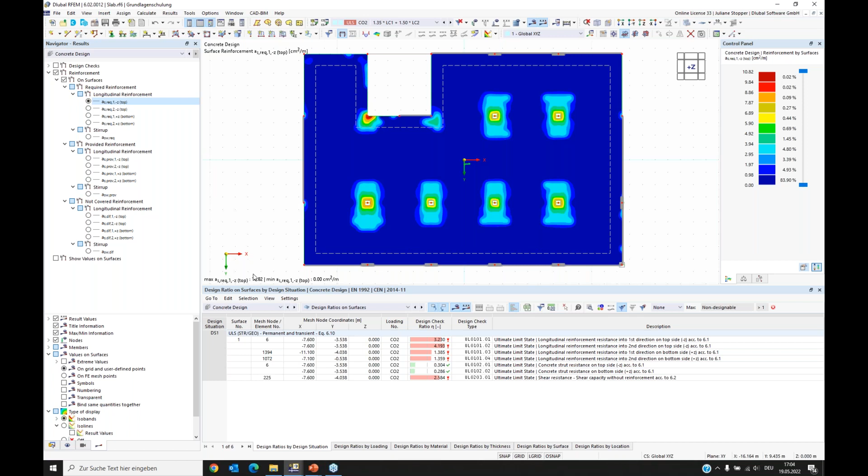Okay, these were the results of the design checks. And now we can have a look at the reinforcement the program calculated with doing these design checks. We can see which reinforcement is required from all these design checks the program did. And we can have a look at the top. Here we can see which centimeter square per meter, how much is needed for top in direction 1 and direction 2, and also for the bottom of the surface.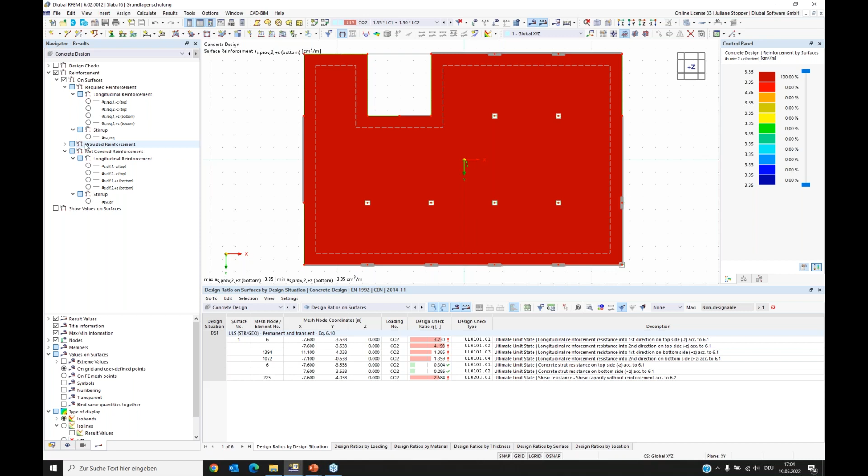What we also can see is which reinforcement we provided. We put reinforcement in there, and here we can see it. It's 3.35. We put this in each direction at the bottom and at the top. And the program also gives an overview about the not covered reinforcement. So we put some reinforcement, and it compares the provided and the required reinforcement and shows where our provided reinforcement is not enough.

And there we can see at the top of the surface, in this area, we don't have enough reinforcement in this direction and in the second direction like this, and here in the fields. So the first step that I want to go with you is changing the bottom surface reinforcement. Therefore, I go back to the data navigator, and before I went to the design properties by clicking on the surface. Now I want to show you that all these concrete design settings you also can find in the data navigator.

We have here the types for concrete design, and here all our reinforcements in the whole model. And here we have the configurations for the concrete design.

But now we want to change our reinforcement. The second reinforcement, as we can see, is for the bottom. I double click on it and I can edit it. Now I want to put the diameter 1 centimeter at the bottom of the surface. I say OK, and the program gives a warning because our design results will be deleted since I changed the reinforcement. It's OK for us, and I can recalculate the concrete design.

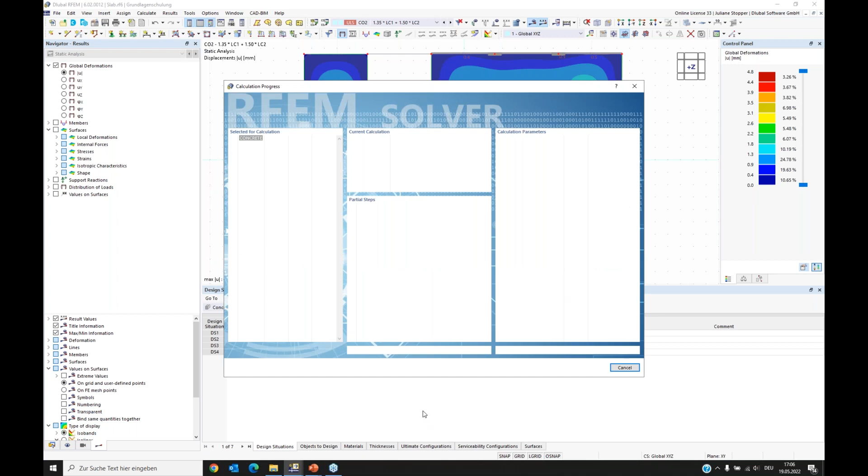So now we can have a look into the not covered reinforcement, and we can see now I put enough. We don't have any problems at the bottom of the surface.

Now we want to care about the top. I didn't change something yet in the top. What you always can do is, if you go here on the design ratios, you can have a look at these positions where the ratio is too high, like Daniel showed. You can double click on the design check type and compare it with some analytical solutions or hand calculations. You can check everything that enters into the design check for the concrete design, and you can follow the standards, the equations from the standards, as we always write from where this equation comes, and you can go there and compare it. It's really comfortable to follow what our program is doing in this concrete design. You can find all these values that you need, everything that you did.

Each formula is listed here.

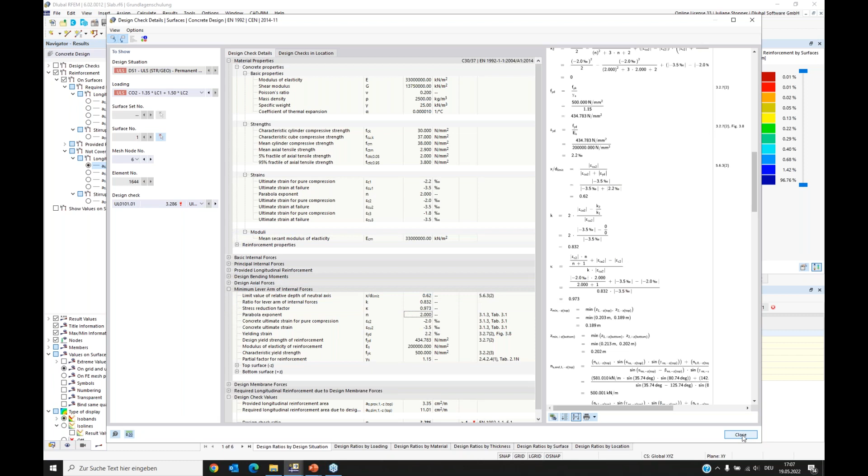Yes, and when you check this and you agree that there is more reinforcement needed, you also can put some local additional reinforcement, and we will do this now for these supports places.

Therefore, we go back to the data navigator again, and I can do a right click on surface reinforcement and say that I want to create a new surface reinforcement.

And here we have the type, and now I don't want to put reinforcement on the whole surface. I want to use a free rectangular reinforcement. The material is automatically entered here. What I want to do is apply a reinforcement only on the top, as I have the tension on the top, and I want to have it in both directions, and I will put 16 millimeters with a distance of 10 centimeters in both directions.

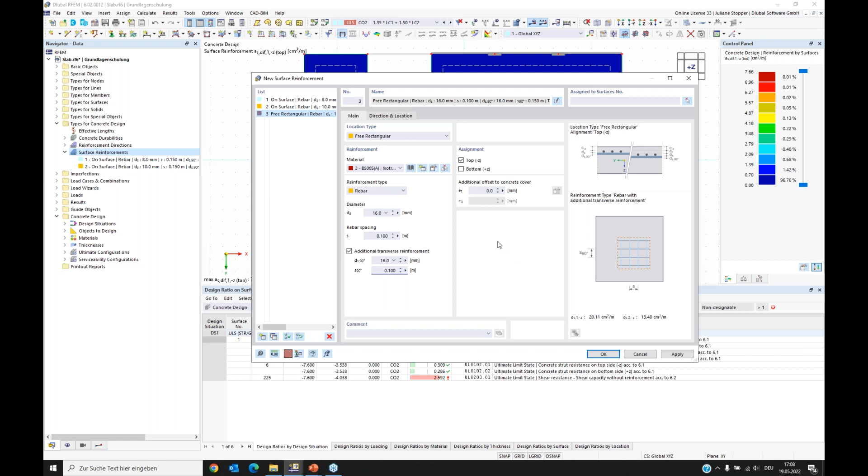So here you can set the diameter and the material for the reinforcement, and here you have to enter the position of your free rectangular layout of the surface. You also can enter which reinforcement direction shall be the first, but we can keep the default settings.

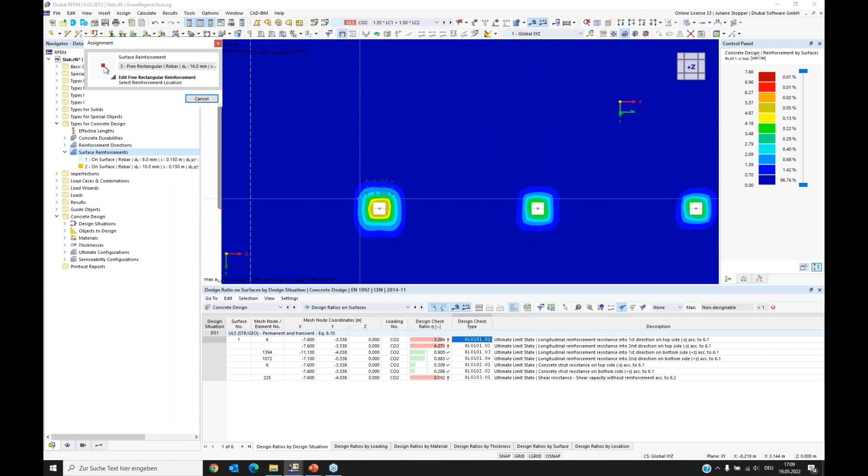What I want to do is tell the position, and I prefer this setting now for our problem. Here I can enter the center. I can pick it on the working window, and I can enter the dimensions, and I want to have 3 in this and 4 in this. Okay, and it's going to be assigned to surface number 1.

I say okay. It comes the warning again, and I don't want to see results now. And I also will switch the wireframe view. I want to show you the reinforcement.

Therefore, I again activate the types for concrete design. And here now we can see we have the surface reinforcement still, and we have some additional reinforcement there. I can also switch off the surface reinforcement of type on surface, and then I can see only my additional.

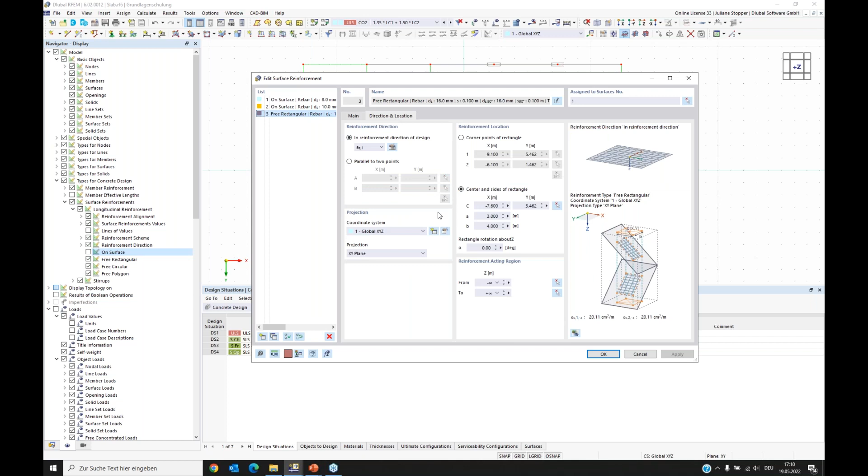I didn't want to have it like this. I want to have it with 4 meters and 3 meters. I want to have it like this. Okay. And now I want to copy this. As I see the distance, I want to have at all supports this additional reinforcement.

So I want to copy it here and here. And the distance is the same. So I can use this: the move and copy function, and say create copy, but not only one. I want to have 3 copies now. And I can tell the displacement vector it has to be a distance like this. And I can say OK. Now my 3 copies are directly generated.

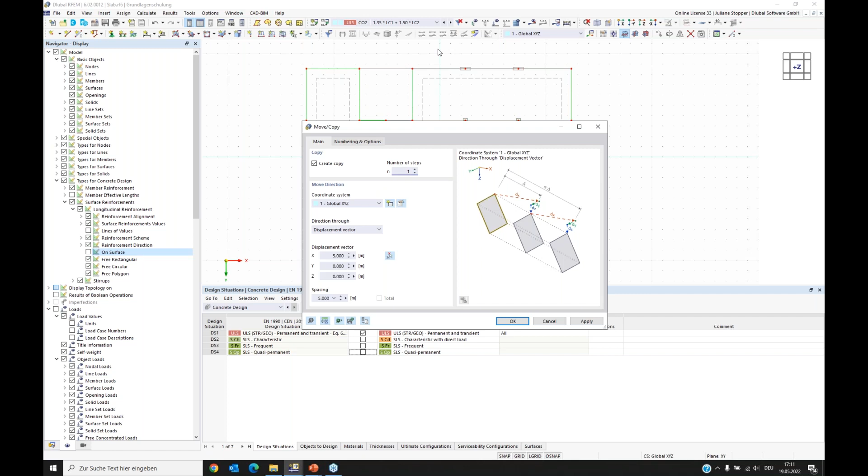And I want to also have a copy up to here. I need here some additional reinforcement and also at the corners. Now it's only 1 because I don't want to have more in the next row. I give the distance, it's the same like from here. No, I cannot do it like this. The displacement vector has to be from here to here. Okay.

And also I want to put here some additional reinforcement. It's due to the change of stiffness. We have here the supports, and here's no support. Here's the L-beam, and again here comes supports. We also have some singularities here. So I also put some—I put a copy there.

Okay, so this is it. Now we can again calculate it and check the results.

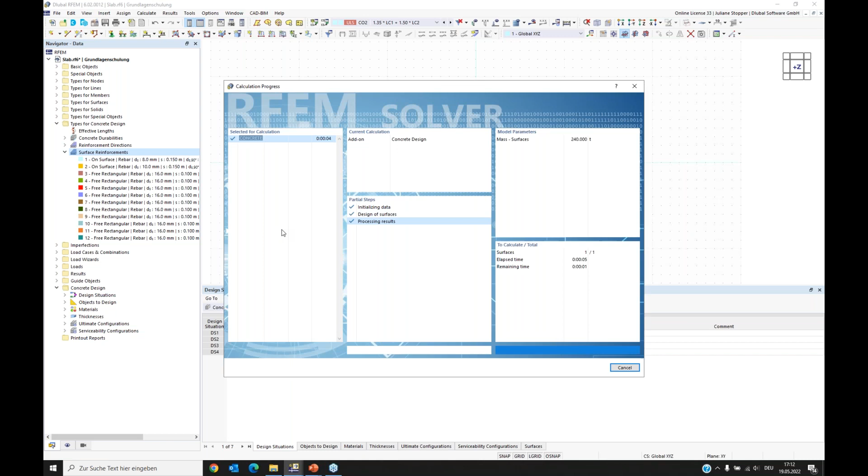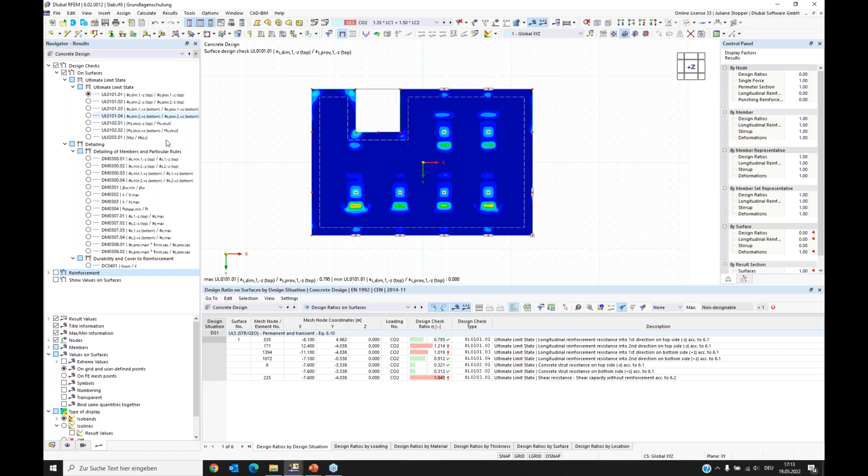I again switch off the reinforcement, and we will go into the design checks and check the top. I have to switch on the design checks, can switch off the reinforcement, and now we see the first direction on top, and also the second direction at the top.

We see that we have at very small places some higher values, but mainly we fulfilled the requirements of the standard with our additional reinforcements. So I want to now keep this design.

I only want to show you a last thing. You can also change the type of display. When you want to print it, for example, it's not very comfortable if you have so much color in it. Here in the navigator results at the bottom, you can change the type of display. For example, you can change it to ISO lines.

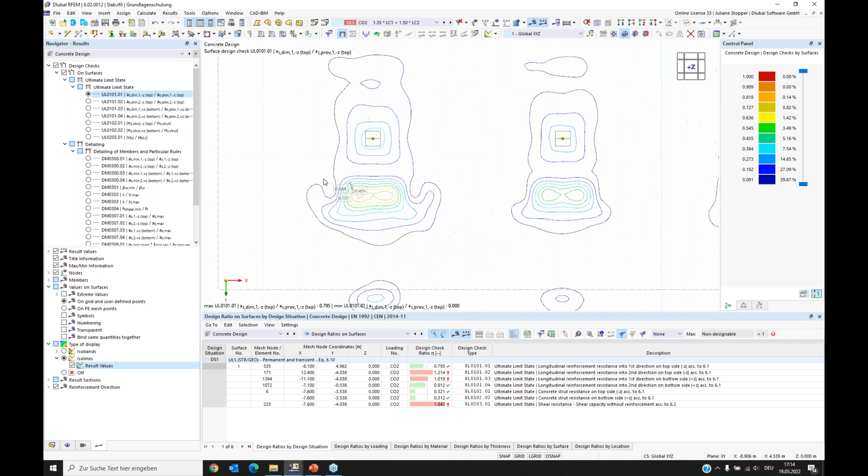And you can say that you want to see the result values. Then you have the values for each line, and it's more easy to print into your report or something.

And we have another option which is comfortable for this. You can show values on surfaces. Now it's a bit crowded, so we close this. It showed so many values because it shows the values dependent on the grid within this setting.

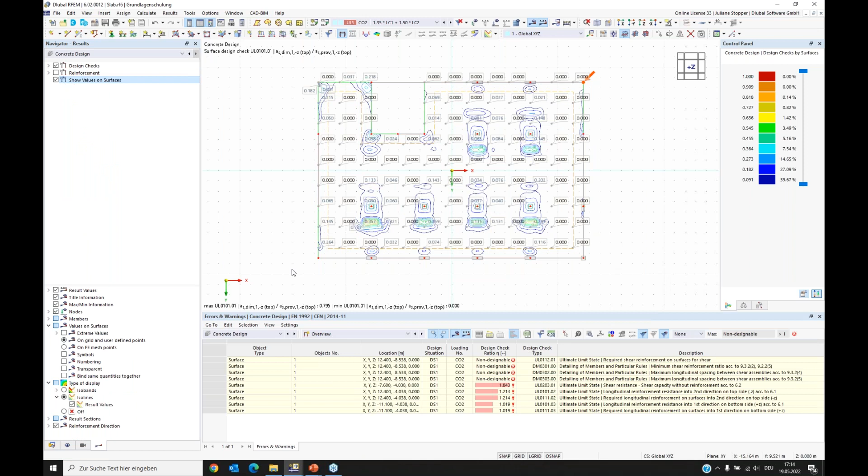And the grid we can change in the surface here. We can say we want to have a grid with bigger distances, so there will be less values shown. And we can shortly calculate them. And then we can also use the values on surfaces, which is nice for printing it, for example. Okay, so this is it.

This is what I wanted to show you as an introduction into the concrete design for surfaces, for slabs.

Yes, I would like to give my word back to you, Daniel. I think we learned a lot. Perfect, okay, Juliane, thank you very much for this. You're welcome. It was very interesting because of the reinforcement and concrete design of slabs.

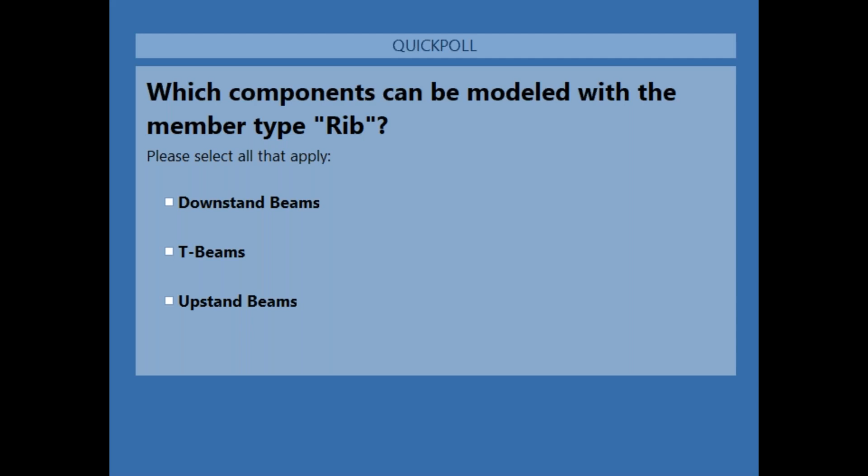Okay, so most of you have voted. I close this, share the results. So all 3 questions are correct. So with the member type Rib, you can design downstand, but also upstand beams and T-beams. When you want to consider the integration width, you have to use and consider the member type Rib. So the next part is this one.